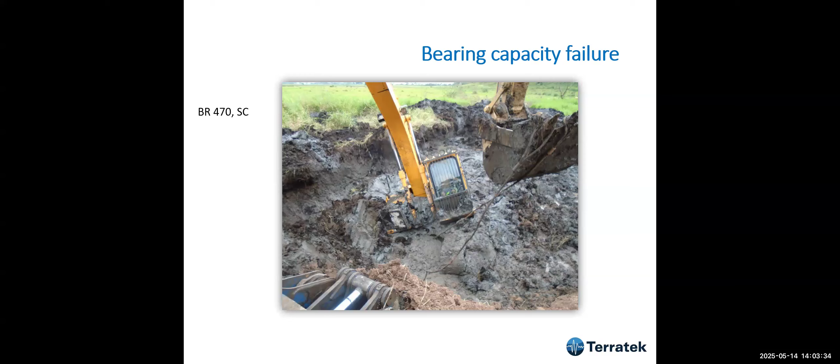Common problems that I have seen along my life: failures like bearing failures on soft soils. I've seen this one, a road in South America. This is another bearing failure which I had the opportunity to see, which took place in southern Brazil due to bearing failure. When this construction started, I suggested a solution, which was to reinforce with geosynthetics, but they decided not to do it.

I have seen many failures in embankments on soft soils, like this one, and this is probably the largest one I have seen. It was a very high embankment. Let me get the pointer. We see here the cracks, and the bulging of the clay in front of the embankment.

The other thing I've seen too many times are settlements on approach embankments, and this leads to big problems because there's a bump. I've seen these on railway projects and highway projects as well. On railway projects it's a big problem because the train bumps, and this may lead to mechanical failures which have to be addressed.

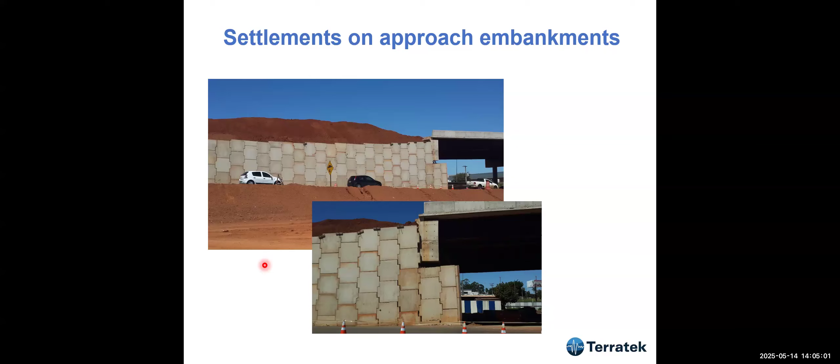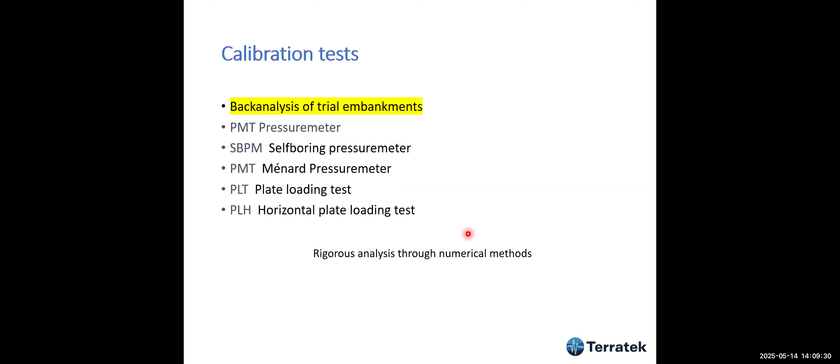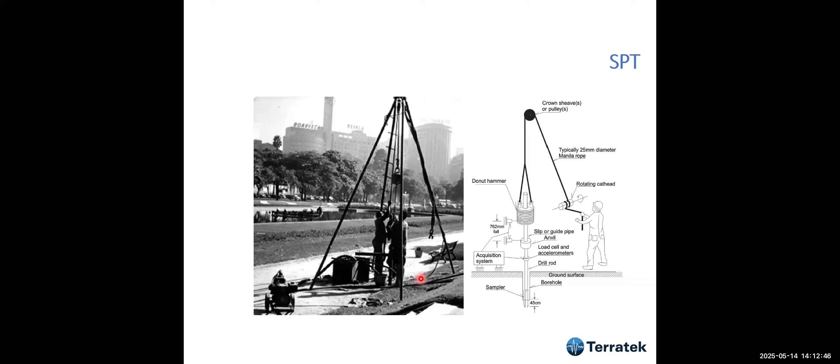The test is very simple: we drive a standard sampler into the ground and count the number of blows needed to make the sampler penetrate 45 centimeters. These are very standard tests, I'm not going to describe them with lots of details.

This is a very common, well-known figure of the SPT sampler. It was developed in the 1930s in America, and it has an outside diameter of 2 inches, which stands for 50 millimeters. The inside diameter is about 35 millimeters, and it's a thick-walled sampler. This means that the material that goes inside is going to have lots of disturbance.

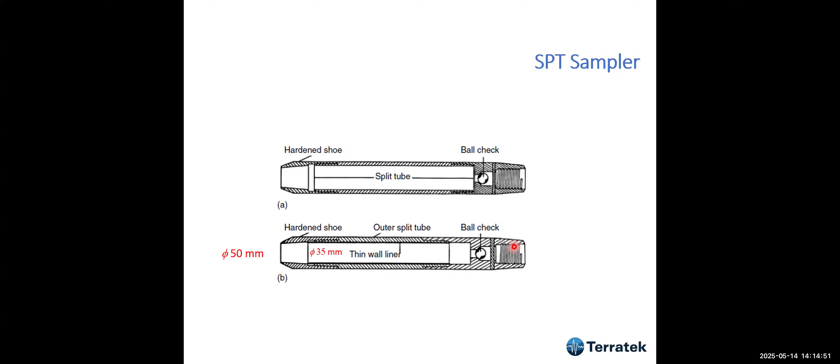Usually in soft soils, SPT is very low and it's not used. The only advantage of SPT is to determine the depth of the soft soil layer. In general, we take the soft soil layer up to SPT number equal to 4.

What's this SPT number? It's the number of blows to drive the sampler 30 centimeters, or 1 foot. These are very standardized tests used everywhere and very important.

But for soft soils, it's not the best, because if it's equal to 0, or very close to 0, it's impossible to get any property.

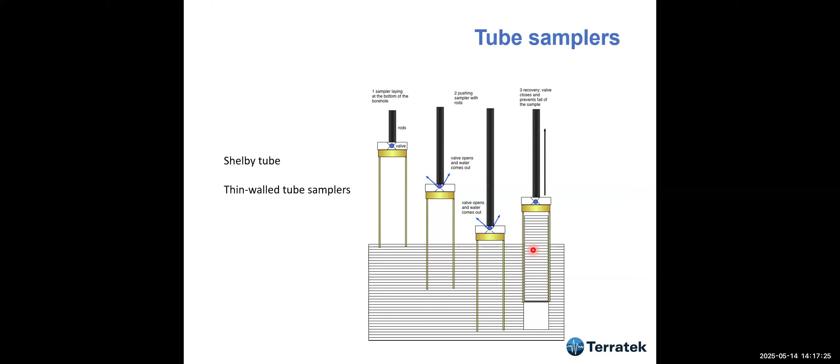Many years ago I carried out research, part of my MSc thesis at the time, in which I carried out lots of unconfined compression tests and UU triaxial tests on samples from different diameter samplers, as I'm showing here.

I started with the 50 millimeter diameter sampler, a thin-walled sampler, 63, 75, and went up to 100. As a result of this analysis, I found very easily that the larger the sampler, the better the results are. I published this long ago in one of my books.

The best quality, which yielded the highest value of undrained strength from these tests, were the 36 millimeter specimens obtained from a 100 millimeter diameter sampler. So we tend to use diameters above 75 millimeters. Under this value, there might be a lot of disturbance to the sample.

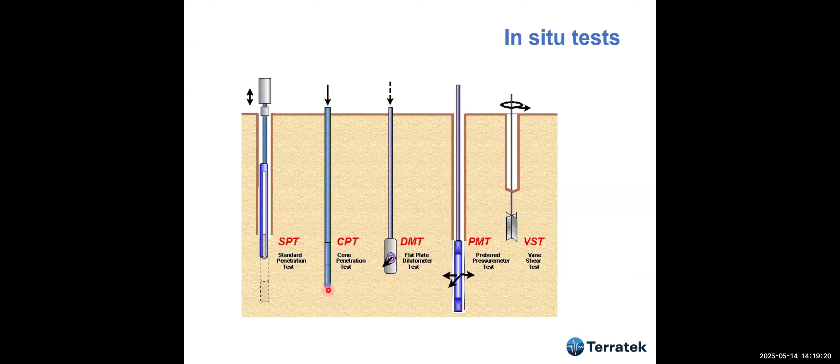Then comes, for me, by far the best test, absolutely essential in any project with soft soils, which is CPT. It's a cone, an instrumented cone, in which we measure three parameters, and it's pushed into the ground statically by means of a hydraulic system. The reference to these tests you may find online.

A little bit of CPT history. The first one to carry it out was Barendsen in 1931 in Holland. The Dutch had to develop something completely different from SPT, because Holland is a place of very soft soils — the SPT there is mainly zero all the time, so it's almost non-useful. That's why they decided to develop something completely different with static penetration, and they were very successful. So 1931 was the first one.

Then Gouda — Gouda is a place in Holland where they make that famous Gouda cheese, and also there was a mechanical factory, the Goudse Machinefabriek, which made these cones and developed the mechanical cone, Vermeiden in 1947. Then the electrical cone came with Fugro in 1964.

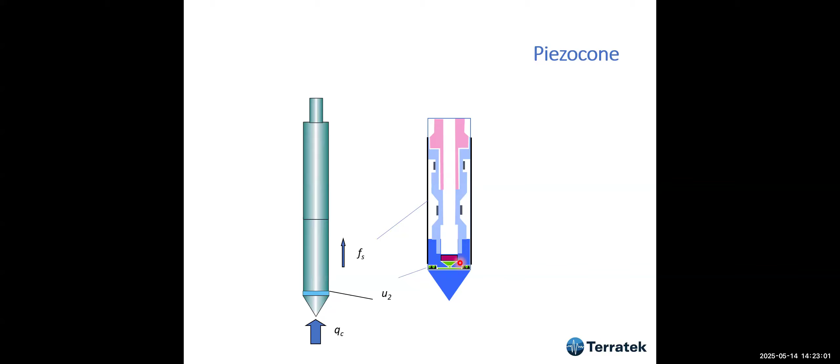So this is how electrical cones are made. They have a sleeve, a load cell for the tip, a load cell for the sleeve as well, separated, and very important, the pore pressure gauge.

There are many standards, but the ASTM standard is very good, and I always invite you to have a look at this standard - this is one of the best. Almost every country has a different standard, but this is quite good. Not all American standards are very good, but this one is, and this was my first experience with CPT.

I was doing my PhD at this time. I just finished my MSc in 1975, and there was a colleague of mine, Camilo Borges, who was working on the cone. He carried out the first approach of cone testing in soft clays, and he used this at the time.

We used this plotter. We didn't have digital equipment, so everything had to be plotted, and the results were obtained from the plot. And it took a long time.

I worked in Britain from 80 to 84, and at the time we used a plotter like this as well. Fugro used a plotter like that too. So, very very old equipment.

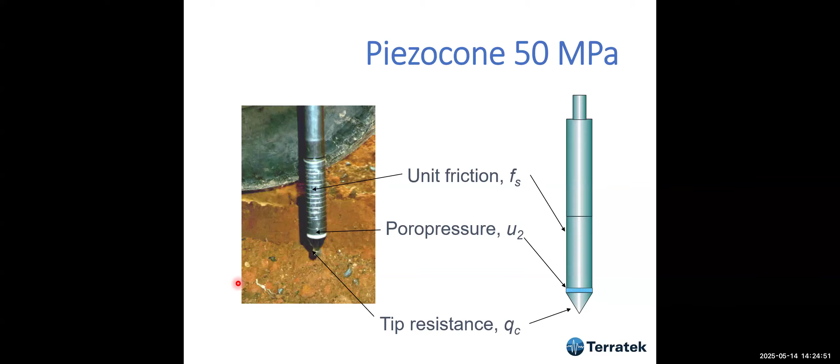This is in 1994, about this time. This was the electronic engineer that worked with me, and he developed the electronics for the cone. I bought a cone from Hogentogler, manufacturing in America, and we made the signal conditioning - but this guy made the signal condition. All we turned into a digital cone, and this was a big development for the cone.

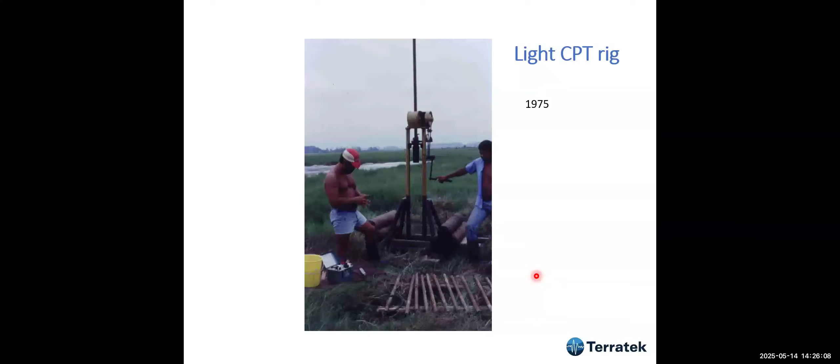As you can see, this was the first time, in 1975 - my first test that I showed you was carried out with this mechanical rig, very very rough mechanical rig that we used at the time.

And we carried out not only CPT, but a lot of seismic CPT as well. I'm not going to address this because it's usually not very important for soft soils. I had a marvelous experience learning from Professor Campanella at UBC at that time.

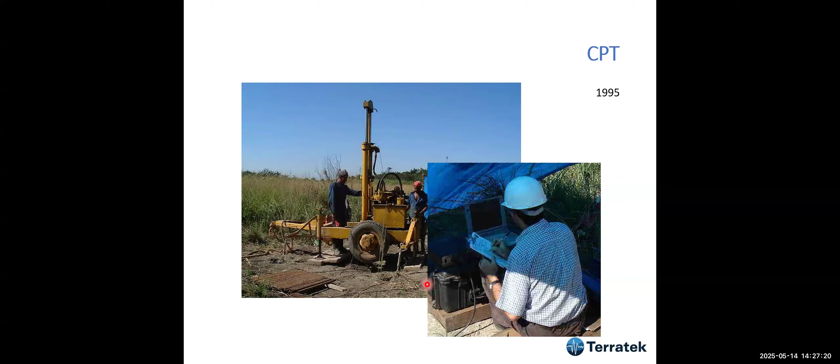And this is when we start to do tests back in, I think, 1995. That's the kind of equipment we had available. The cone was digital already, and this was a portable equipment.

Also, we have done some projects on a few mines in Peru around that time, and this was the truck I was working with. Well, what's amazing is it looks like I have worked in this truck twice.

One of them, the first time was 1984. I was working at Fugro in Hemel Hempstead in the UK, and I went out in this truck to learn how they used to do CPTs.

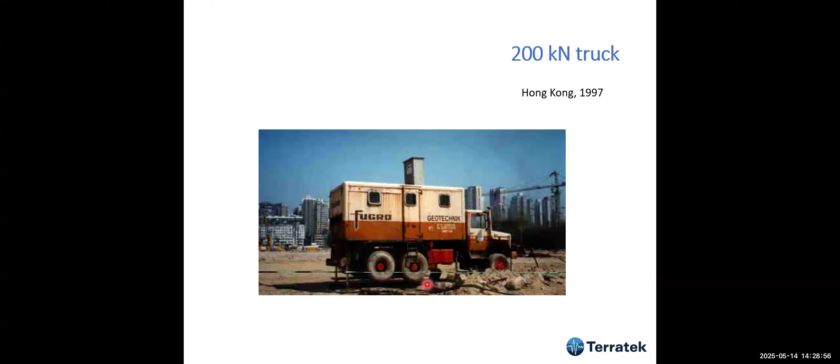It looks like the same cone, the same truck was sent later to Hong Kong by Fugro, and I happened to meet the same equipment in 1997, many years later, and we did a project at the World Olympic Stadium, something like that, in 1997. This was by far the most advanced equipment I have ever seen.

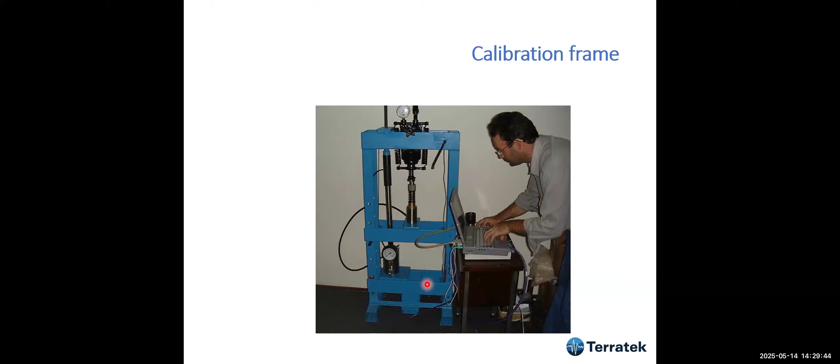We built this calibration frame to calibrate our cones. This is part of the quality assurance specs or procedures.

We also used this porous element saturation. We have two equipment. One of them was a sonic bath - this is something which is used in a machine workshop to clean. So we used that to clean the porous elements.

And then we have this compressor. I've seen this when I went to the dentist. I said, that's what I need to apply vacuum and to saturate the porous element. This is a big part, a very important part of the job.

Later on, I'm going to show you - I learned with Professor Campanella how to do a proper saturation of this cavity here by using a kind of funnel. I'll show you more details.

We put the liquid here. The liquid is... water, and I forgot the name - not water, I remember, sorry about that. It's something more viscous that we mix with water. We never use only water.

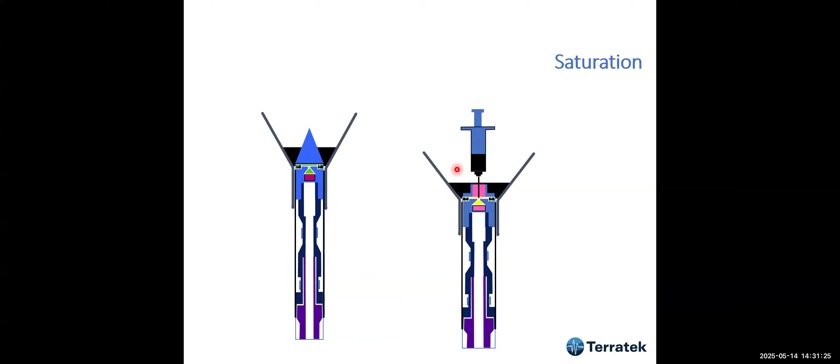And then what we do, we take the tip off and we use a syringe to saturate the element from inside out. This is the late Professor Campanella - he passed away a few years ago. He taught me this, how to prepare the cone, how to take off the tip, and how to do the saturation with this.

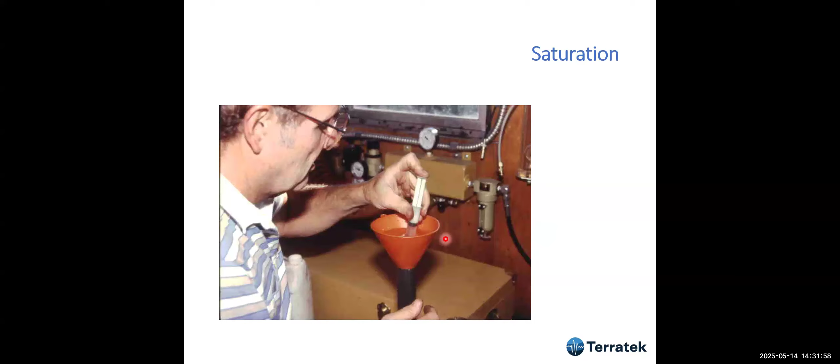And how to use the syringe to fill up the cavity from inside out, and then we use a condom - always use a condom here to make sure that we don't lose saturation during handling.

The other thing that was developed in UBC - they found the effects of unequal end areas. Professor Campanella told me a very interesting story: Fugro at this time already knew that, but they did not understand why.

They used to do offshore tests, and they used to zero the cone before going down into the water. Then when they came very close to the mud line, 100 meters or however many meters below, they found that the numbers were different on the screen - the measurements of tip resistance were different. So they had to re-zero the cone there.

Professor Campanella had the idea of testing and testing, and after some time he came up with the solution: you have this imbalance because the area behind the cone is different from the area in front of the cone. This ratio leads to an imbalance.

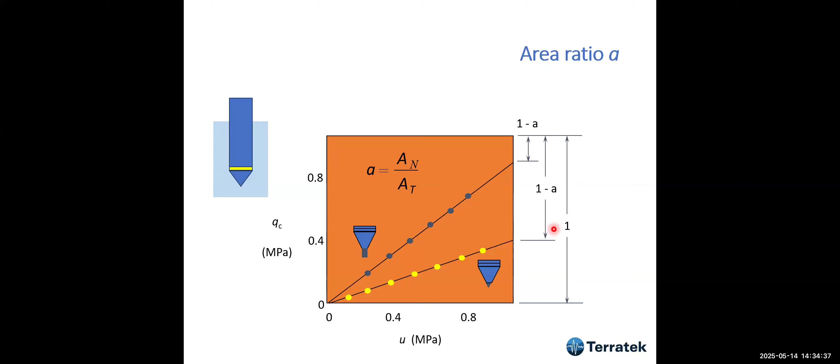But for the cone, what Professor Campanella did was put the cone into water and applied water pressure. He found that as he raised the pore pressure, QC also rose. So he concluded this should be a perfect cone, and most cones would behave like that. He proposed, and we used it a lot, a correction to the tip resistance.

We call it QT, the correct value, which is a function of the measured QC, a function of the pore pressure, and 1 minus A, where A is the area ratio between the top and the bottom of the cone. In most cones, this area ratio is 0.8 - it's impossible to have a perfect area ratio of 1.

We do one test once, and then we get this number, and we use it for all the calculations. The other thing which is very important...

I had a lot of problems until I found the best way to take measurements. The important thing is to get very good saturation.

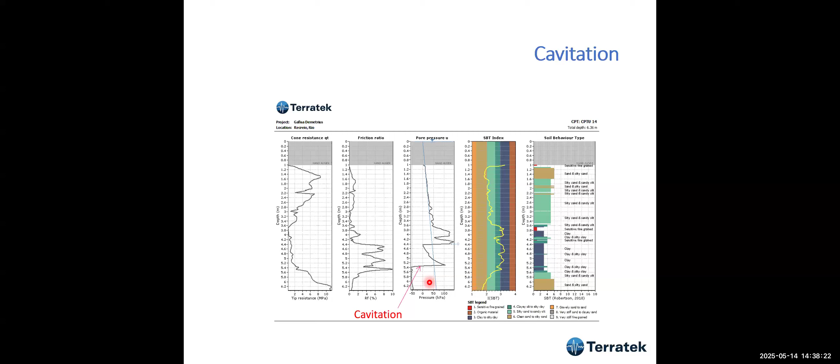Sometimes cavitation is nearly impossible to get rid of. This is a CPT we carried out to 6.3 meters depth, and I was unhappy. We carried out this blue one first, okay, and I was very unhappy with the loss of saturation at this point. Then, by analyzing the data, I asked the operator to do another one nearby.

To ensure better saturation during penetration and avoid loss of saturation, we carried out a small borehole, let's say 50 centimeters deep. We filled it with water, and then started the penetration again, and we got this red line, and we see much better pore pressure results. So this is an important point.

Stratigraphy - let's talk a little bit about this. This is how it started many years ago, in the early 80s. That's how we came up with stratigraphy. If we have tip resistance, in sands we have very high tip resistance. In clays they go back to nearly zero, very low values. Then we have another layer of sand, it goes up again, and then clay. So in the beginning, interpretation was only done by tip resistance.

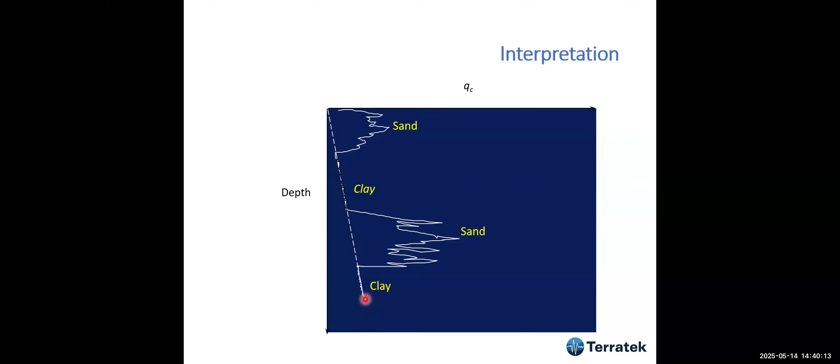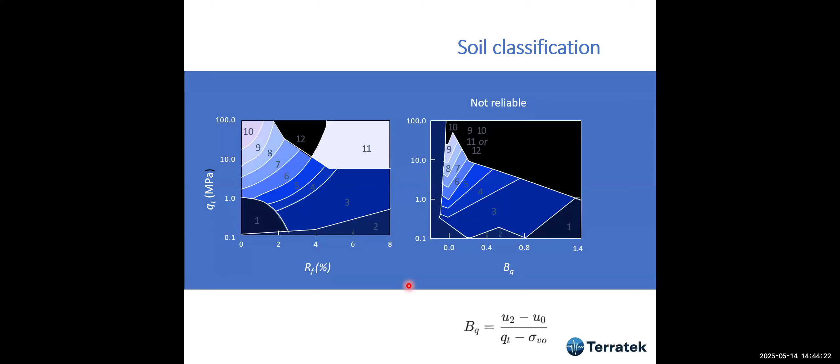On the other hand, Peter Robertson did marvelous work. I think he started with Campanella, then moved to Alberta, and he came up with this soil behavioral type, which is more or less the same as before, QT versus friction ratio, but he added different colors, normalized color behavior, so we can easily see what type of material we are working with. The first soil behavioral type classification he came up with had QT in megapascals and friction ratio in percentage.

Later on, this evolved, and I'm going to show you how we do it today. Usually CPT produces an enormous amount of data that takes a long time to process. While I was at UBC, we used to spend almost a week, four days at least, working on the data we got from a one-day field work. But today we have very good software.

For instance, what I use is this CPT software by a Greek company called Geologismiki. I also use CLiq for earthquake analysis, and I use this a lot. It's very helpful and makes the analysis very fast.

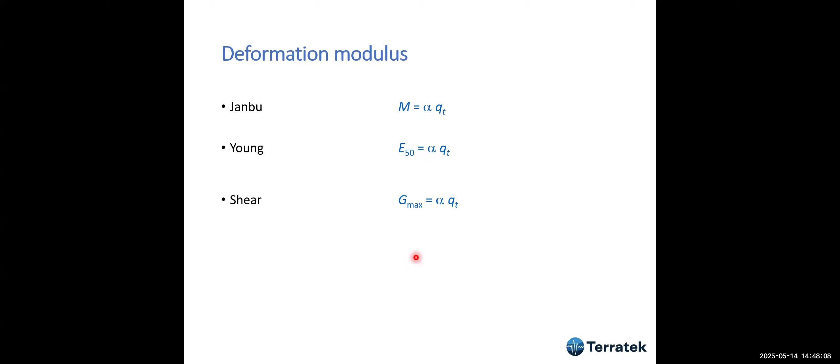This is very important. This is the first attempt, by Janbu, to come up with a one-dimensional deformation modulus M, and we can also come up with Young's modulus with a correlation like this, and shear modulus also with a correlation. Of course, the alpha values are different: alpha 1, alpha 2, alpha 3. Later on, the first published attempt, as far as I understand, to obtain this kind of modulus from clays was by Sanglerat.

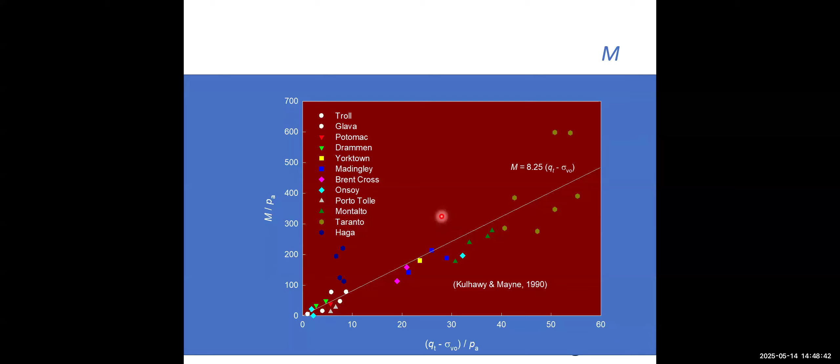He wrote a very important book, in French, and he came up with these correlations, which were used in the past. Later on, we have this by Kulhawy and Mayne, 1990, for many different types of soils, from sands to clays. Everything fits into an equation like that.

Later on, Peter Robertson did very good work. He improved this kind of correlation, the same type of equation, but separated it for different types of soils, for clays and for sands, and alpha can be obtained by this equation. The CPT software I use does it automatically.

What we get is settlement calculation: QT estimates M, and then we can come up with settlements through this very simple equation. I do this a lot, and I can assure you, I did a very interesting project with that yesterday.

The difference between using the laboratory tests and CPT was enormous. The guys who did the calculation came up with a settlement for an 8-meter high embankment of about 0.8 meters. My calculation, which I believe is very reliable, was about 3 times more than what the guys calculated.

I'm sure from experience, I can assure you, this is by far the best way to obtain settlement calculation from CPT. The other very important thing, but not so easy, is the dissipation test.

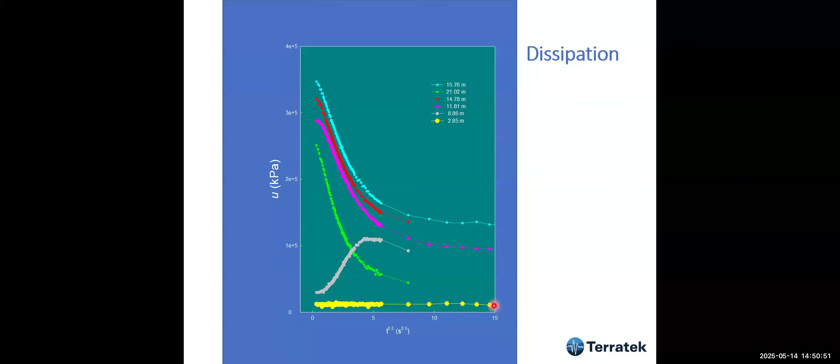So how can we explain dissipation by taking into account dilation and contraction? If you have a sample in a triaxial test that dilates, increases in volume—what happens is that if the sample is saturated, the particles will tend to come out, to dilate, and then the pore pressure would decrease. The contraction is just the opposite effect.

If the sample tends to contract during shear—consider four particles in the matrix—we may have a decrease in volume, and this leads to an increase in pore pressure. So the more pore pressure you have, the more possibility of contraction; it's a contractive behavior. On the other hand, if the pore pressure goes down, you may have dilative behavior. Today these concepts are very important, especially in tailings, and this is what leads to static liquefaction.

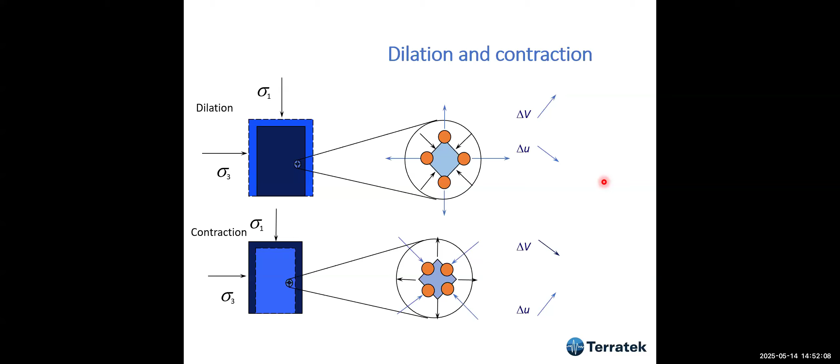Fugro, when I was in Britain in 1984, didn't use the pore pressure element in the beginning. I remember attending a conference at the Institution of Civil Engineers in which there was a very interesting discussion about whether or not to use pore pressure measurements in the cone. Some people were not convinced by them.

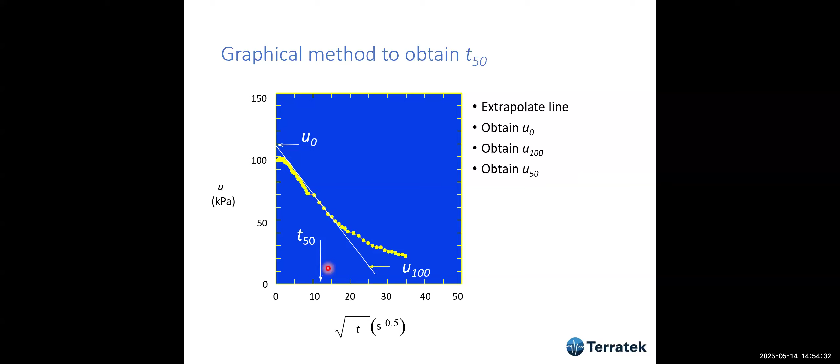This is also used in CPT. How do we do that? We extrapolate the line. This is dissipation plotted against the square root of time, and we draw this tangent line. We obtain U-naught, we obtain U100, then we obtain U50, which is the middle, and going back to the middle we obtain T50, which is used in calculations. This is an example.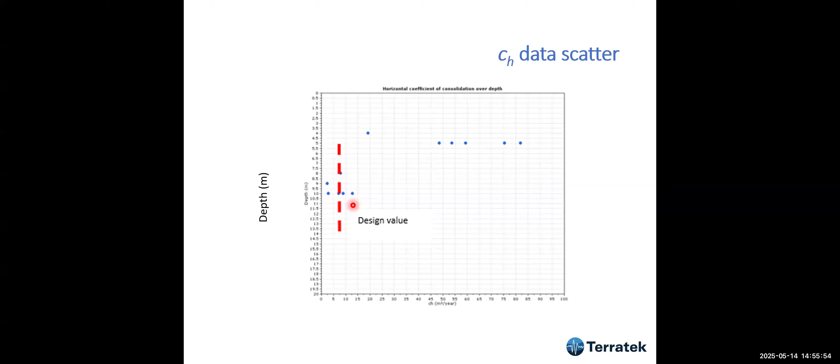And then what I do, I base my choice on experience. These are many sites, soft clay sites in Brazil, in which I have experience. I have all these values plotted, and as you see, there's a very large scattering. Most of the sites... this one, why is it so large? Because it's an alluvial clay, and these are marine clay. Marine clay tends to have lower values than this alluvial clay.

So when I have a project, I compare the results here, and then in order to select a proper value for further analysis.

In addition to that, we have to correct for the different drainage path, because the cone measures in the horizontal direction, and we have to measure for time rate calculation, settlement versus time calculation, we need CV, which is the vertical direction, and we still have to correct. There are ways to do that. I'm not going to discuss this too much, but usually if you divide by 4 or 5, you're not very far from the right answer.

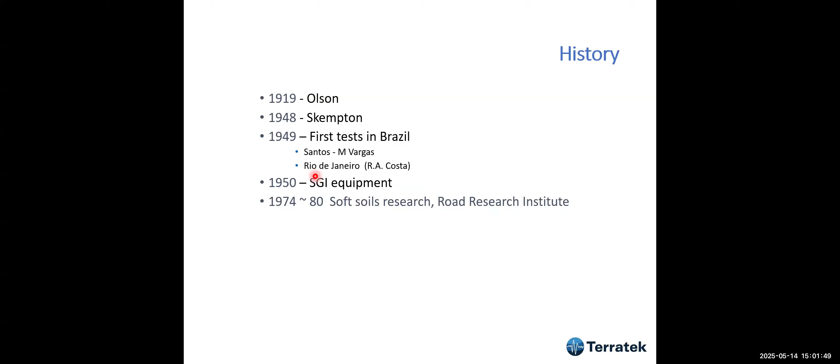I was a very young research engineer, and that's where I did my MSc and my PhD. It was a very interesting, very comprehensive research program. We did a lot of tests, and I'm going to address that.

However, in the end of the paper, although he did a lot of work, he recommended that we should keep the old equation, because that's where the experience came from. And this old equation relates the strength to the torque needed to move the vane, the torque value, and the diameter of the vane, for a vane where the height is twice the diameter.

Okay, and usually this is what we measured during the vane testing. We did an initial test rotating the vane, and you have the undisturbed value, and then we do another test after remolding it. We turn the vane 10 times — it varies according to the standard, but we turn the vane 10 times to get a completely remolded value of strength, and you do the test again. So we take these values of torque and we enter them into that equation.

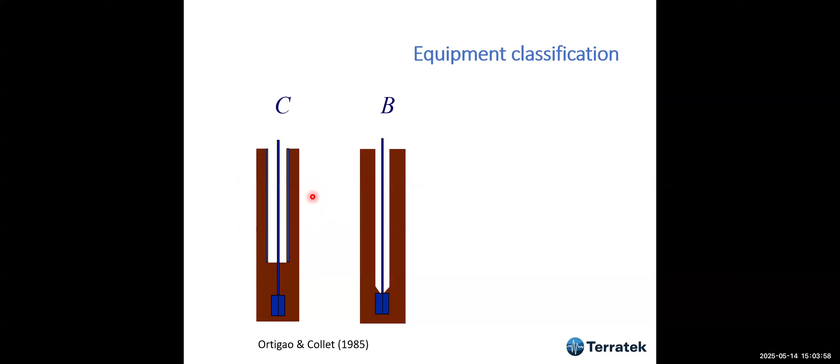And in 1985, I did, with a very good friend of mine, Harold Collet, an equipment classification, because we found out the vane in those days, the results could be very dependent on the equipment. We have this, what we call the C type, in which we have a lot of friction here; the test is done in a borehole, and this was used for many years. Then we have this different B type, in which the rods are protected against friction, like here, okay?

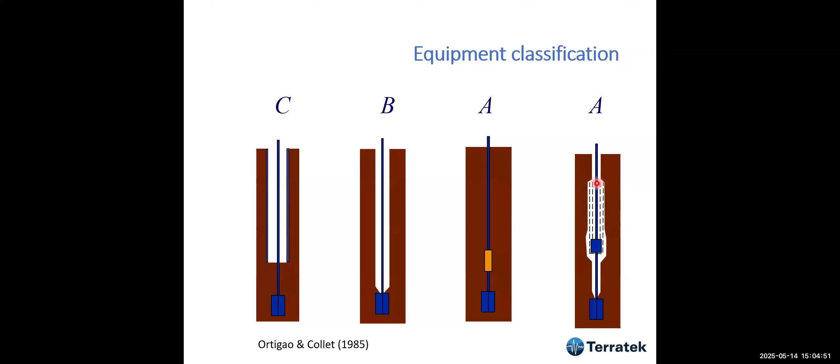We have the type A equipment, which may have a torque measuring device. In those days we didn't have that, but today we may have equipment with a torque measuring device, which could work well, so we get rid of the torque above. This is what we did in the past, originally suggested by the Swedish, and we designed something like that to have type A, and I'll show you why.

The equipment types are: first, the unprotected vane in a borehole with fully protected rods, so no friction on the rods. Then unprotected vane, unprotected rods, but you can have a torque load cell. And protected vane and protected rods. When we did this work, this was our choice because we didn't have a good torque cell at the time, and this is the kind of results we got.

We went to a site not far from Rio de Janeiro, a very soft clay. We did about 10 boreholes taking torque measurements, and this is what we got: very large scatter in the results. And why?

We found we had the problem of torque and the problem of translation. The vane would present a translation, so these problems would affect the measured values.

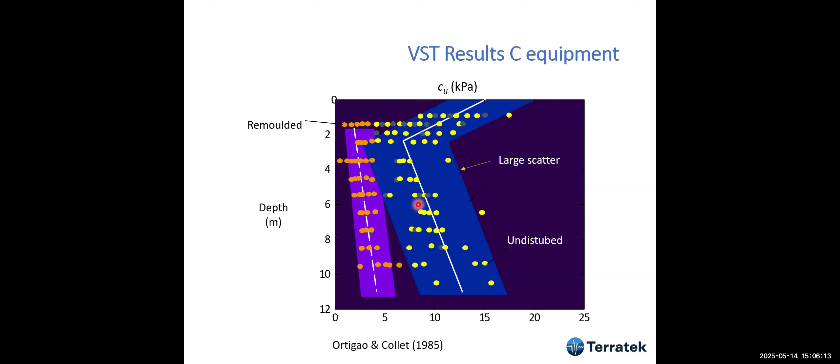The other thing we found: in those days the ASTM standard suggested we could determine rod friction by not using the vane like this. What we found was that it was nearly impossible to do this kind of correction, because the results were totally difficult to understand. For instance, we have a 2 meter torque, 3 meter torque, 5 meter - this is the depth - and it was very difficult to find out what the actual torque would be.

So the friction had a tremendous effect on the torque. The equivalent CU from these friction measurements would be 2 to 4 kPa, almost half the strength of that clay. So we decided that equipment was not very good at all - this was 1980, 1981 technology.

We decided to carry out a complete redesign of the equipment. I found a mechanical engineer, a friend of mine, who helped us completely redesign it. The rods were totally protected, with bearings to avoid friction, and the vane would go into a protection shoe - this was the Swedish idea which we used. It was a steel protection shoe. The vane came out, did the test, and went back into the protection shoe. He also designed a better unit, and we used this, and the results were completely different.

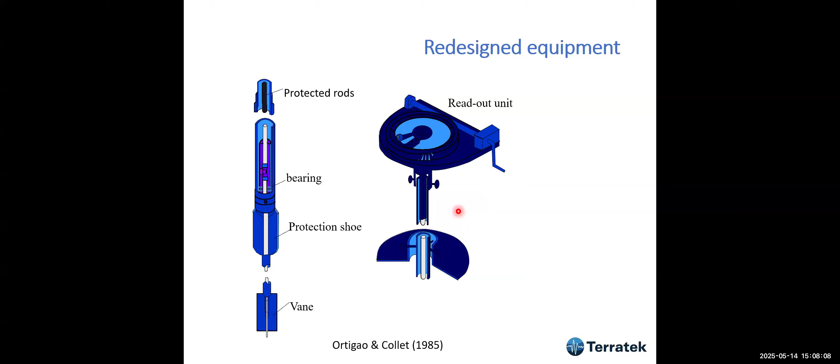I presented this paper at a conference, an ASTM conference, I think it was 1985 in Tampa, Florida. I went there, presented the results, and we confirmed two things that were very clear from that conference. First, we have to standardize the vane, because diameters and shapes vary so much, we may not have a standard for the vane. And this test is partially empirical, so that's why standardization is so important.

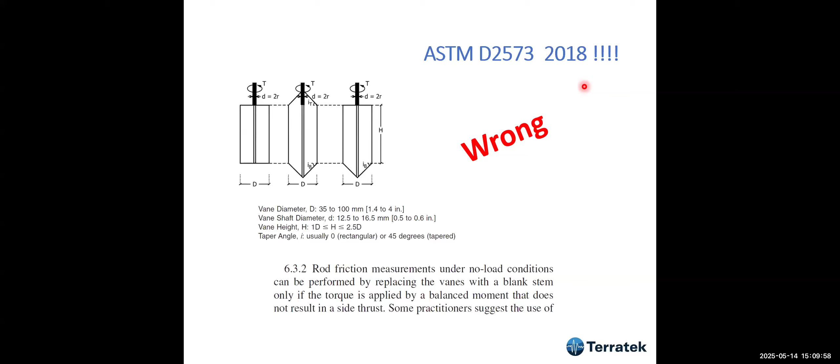But the worst part was that in that standard, we told people very clearly that rod friction measurements under no-loading condition cannot be performed - cannot. But still they keep it today; in the 2018 standard it's still there. I think it should be changed. But since 1985, despite the conference that I attended and many people agreeing with that, nothing was done to this standard.

Let's go ahead. There was a big discussion in those days, started I think in 1972 by Bjerrum. Bjerrum was the first to address vane correction. He came up with the idea that as a function of PI, plasticity index, we would have to correct the vane shear strength empirically. He was the first, in 1972. Then other people came up with some ideas, etc.

The problem is it's not an easy task to do this kind of correction. What people tend to use today as a vane correction factor, in order to get a factor of safety of 1, is to correct the value by multiplying field values by 0.7, and that's what I do. The scatter in these PI values could be very large, so if we use 0.7, we may get the correct answer.

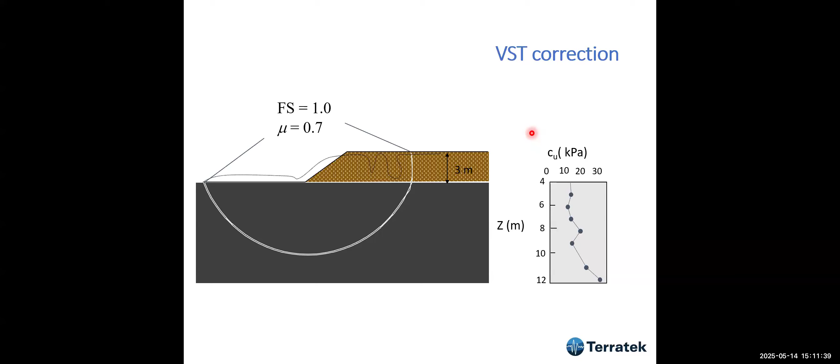Another thing is that at sites where we carry out lots of field vane tests, very good ones, very reliable with good equipment, you still have a lot of scatter. Then you have to decide what shall be the design profile. If we use the average, we may be very far off. This is the design decision I have used, and you still have to multiply this by 0.7 to get the results. That's what I usually do.

Also, what I always do is a kind of calibration. I always compare the results from vane testing, undisturbed, with the values obtained from the cone correlation, from the piezocone. This is very important. In any project, you should combine CPTU and vane testing, and compare the results in order to calibrate the correlation you're going to use for the cone. Here's the kind of calibration I've done in one of my projects.

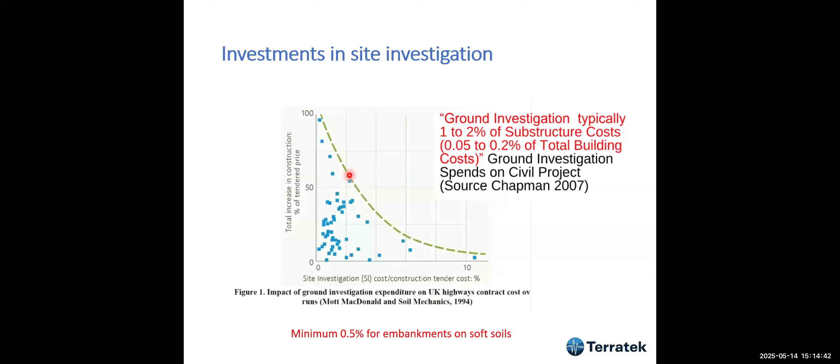This varies according to the type of structure, but also the risk. For instance, in dams we should invest something like 3% — that's the target, and in tunnels as well. In soft clays, the minimum should be 0.5% for embankments on soft soil, because the risk is lower than tunnels and dams. This should be the minimum investment you should always take into account.

And trial embankments — this is the way that I've learned. I have worked my whole life on all these trial embankments. The first one was in 1975; I didn't design it, but the ones after that I have designed. I've designed all these embankments except the first one, and we learned a lot. I'm going to address a few of them.

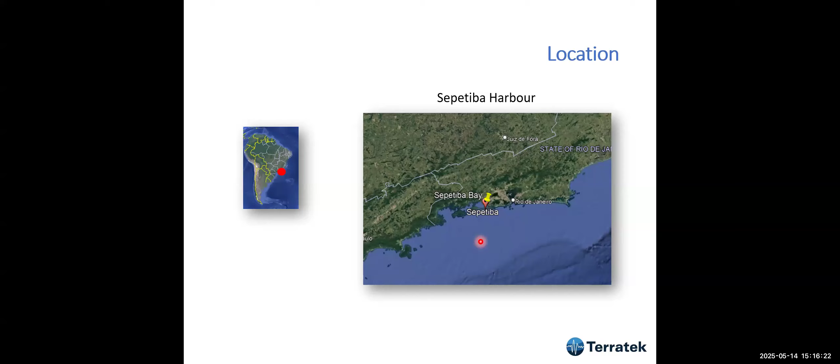There was an Italian company that came to Brazil in those days, and they proposed stone columns. The designer, a big company, Planave, decided to accept the idea and designed an embankment to test these stone columns.

These stone columns were made with casing. They installed a casing with a diameter of 520 millimeters, installed with a vibrator, and tested column spacing from 2.5 meters to 3 meters.

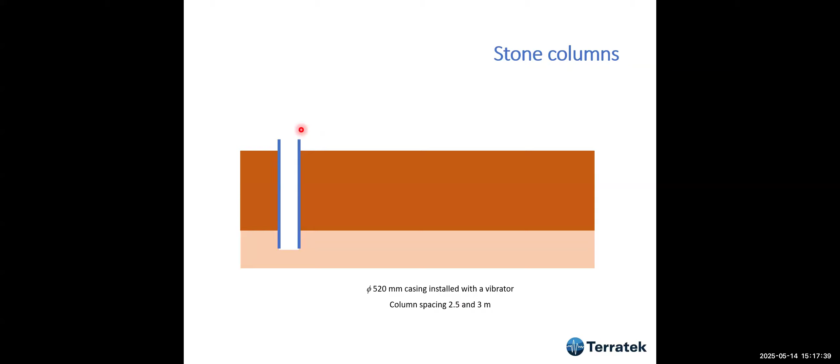The installation method: install the casing, fill it up with gravel, and then use a big vibrator at the top to extract the casing and leave the column ready.

Planave designed an embankment like that, up to 5 meters in height, over soft clay that was 15 meters deep.

To test this, I helped with the instrumentation. In those days I was working at the Road Research Institute, and I had designed and built several hydraulic piezometers, hydraulic twin tube piezometers, to use in the research. This was 1970s technology, so we used mercury manometers to do that.

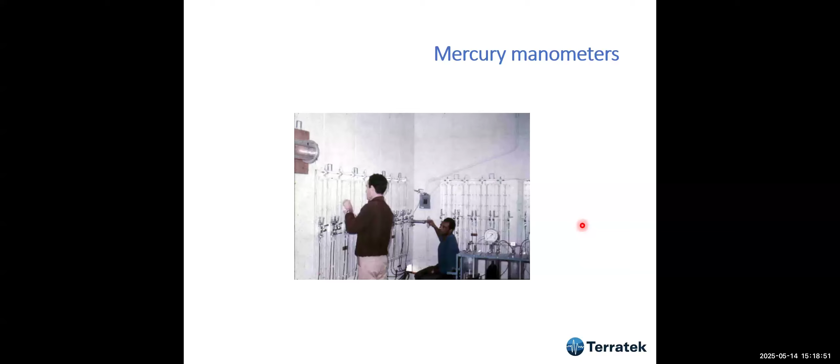Today it's a nightmare—no one is going to use hydraulic piezometers for a job like this. But in those days, that's what we decided to do, and these piezometers were very successful. The equipment for the piezometer was very complex. I won't talk more about it because no one uses hydraulic piezometers anymore; today we use vibrating wire piezometers, which are much better.

Despite all the efforts, the settlements with stone columns were very close to those with no ground improvement. They had two embankments, one on stone columns and the other without, and so the designer decided not to use this solution for the stockpiles of the harbor.

Lessons learned from this embankment: stone columns were not efficient due to the small diameter casing. Today we use much larger stone column diameters, about 900 millimeters, with spacing of 2.5 to 3 meters.

Today we can do calculations—I did some recently just to check—and now we understand that better. The installation method also evolved a lot over the years.

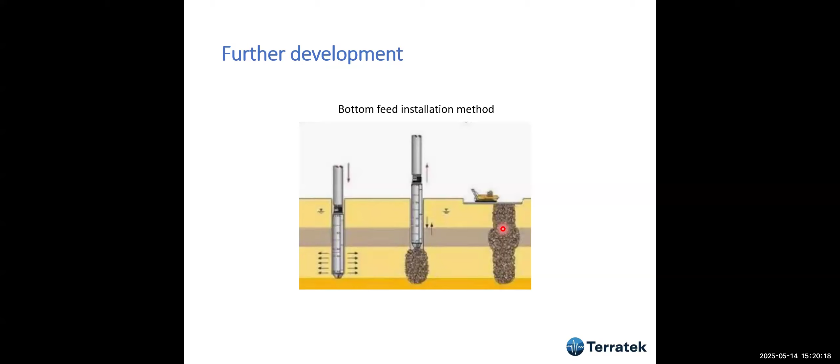Much later, the bottom feed method was developed, in which gravel is installed from the bottom and vibrated with this equipment. This gives a much better column: large diameter, well compacted, with fast installation rates, less soil disturbance, better gravel compaction, and better column continuity.

If we extract with the old method, we may get something like that, which would not happen with bottom feed—bottom feed doesn't allow this to happen. Okay, this is not enough.

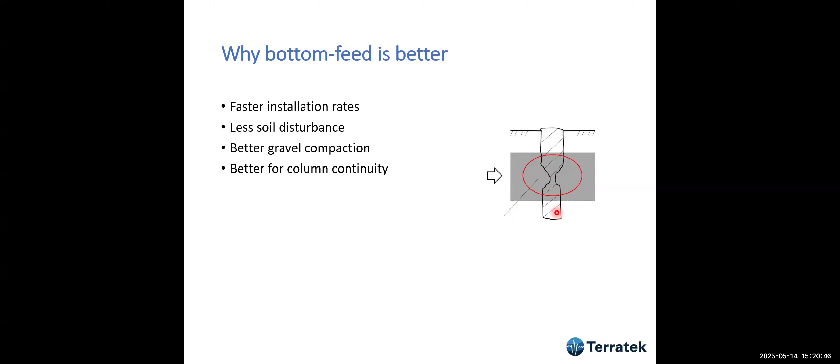The same when I was working at the Road Research Laboratory, we designed these embankments later on. We decided, first of all, to test soft clay. So we found a site not very far from Rio, and this research took place from 1974 to 1981.

We did three different field experiments. The first one was embankment one, which was taken to failure—that was my PhD thesis. And then I continued working on that.

We did the access road, which I'm going to show you. For the first time, we tested geosynthetics under the access road embankment. In those days there was a lot of debate about which type of drain to use: wick drains, jetted drains, open mandrel, closed mandrel.

This was the first embankment, which was my PhD project. It failed on 7 December 1977. It was a very interesting experience.

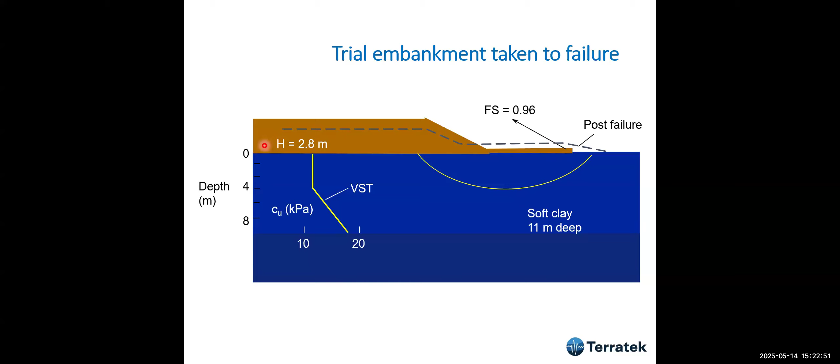But anyway, we did a lot of analysis and found that using the mean value of the vane strength, we could get a factor of safety not very far from 1, which explains the maximum height the embankment reached, which was 2.8 meters.

Lessons: the maximum height was 2.8 meters on that clay. Back analysis using mean uncorrected field vane strength yielded a factor of safety not very far from 1. Bjerrum correction, in those days, we found would not apply, although today I would prefer to apply it to be on the safe side.

The field vane equipment was improved to avoid friction and rotation of the vane, and all instrumentation was locally made. I designed almost everything except the inclinometer, which was bought from Slope Indicator at the time.

This was embankment two, fully instrumented with vertical extensometers, magnetic extensometers, inclinometers, lots of settlement plates, and horizontal extensometers as well. And we tested it, because this was the main question.

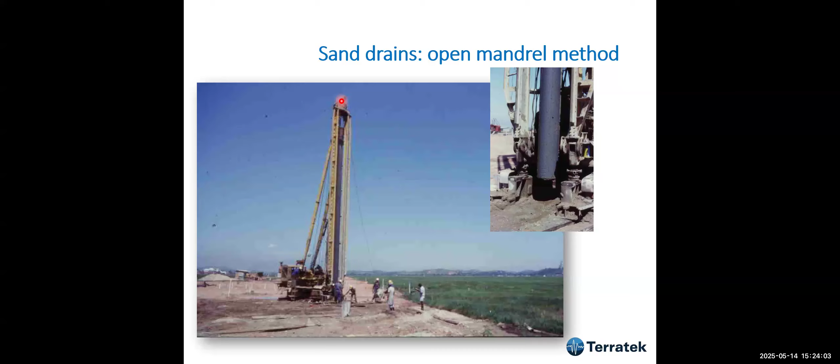Could sand drains be used in those days? What was the best, wick drains or sand drains? This was tested in this embankment. We used the open mandrel method with Franki type equipment, and we used jetted sand drains, which were used in those days by jetting water into the clay in order to create a borehole. We also used wick drains, not the technology we use today, but what was available in those days.

We also had a very bad idea to try non-woven geosynthetic wick drains because we thought the water could come out of this, and it was a failure. What we found later on is that the vertical permeability along the geosynthetic wick drains is very small; only the horizontal permeability is high. So anyway, we tried and we tried and we learned from the mistakes.

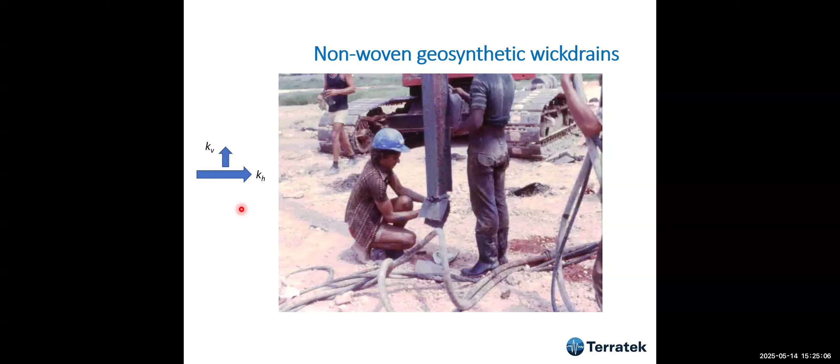But the mistakes were made on a trial embankment, not the construction itself. So, pore pressure measurements: the closed mandrel led to very high pore pressure in the clay, the open mandrel less, the jetted drain not very high, and the geotextile and wick drains had the best behavior in terms of pore pressure during installation.

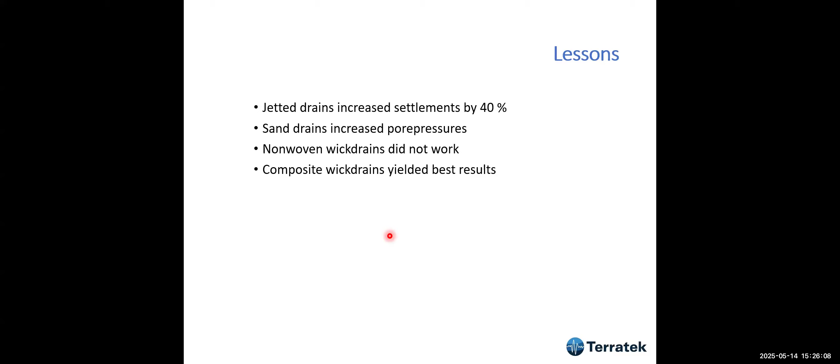And settlements - we measured settlements in all these sections. We could compute, and what we found was very interesting from the experience. I'm not going to give all the details, but we found the jetted drains increased settlements by 40% because of soil disturbance. We didn't know that. Sand drains increased pore pressure a lot. Non-woven wick drains did not work at all. And composite wick drains yielded the best results. So these were the lessons that we learned.

And then we did the access road, which was an access road in order to bring the material to the main embankment. This is the access road design. It was only 4 meters wide for the trucks to pass.

Then a geosynthetic manufacturer, the first I ever met, came to us and gave material for us to test. So we applied the geosynthetic here in order to test whether or not it was a good idea. This was my friend, today Professor Emeritus Palmeira, but this was 1981 - it was his MSc thesis.

We used a non-woven geosynthetic, 400 grams per square meter, but the strain at failure was 30%. I said, it's not going to work - why? Because the strain at failure is too large. Okay, let's test it, let's see.

We did sections like this, with different ways of stretching the geosynthetic under the road. We did it like this with anchors, and like this anchored differently. And what we found is that the geosynthetic worked - despite my initial belief that it wouldn't work, it worked very well.

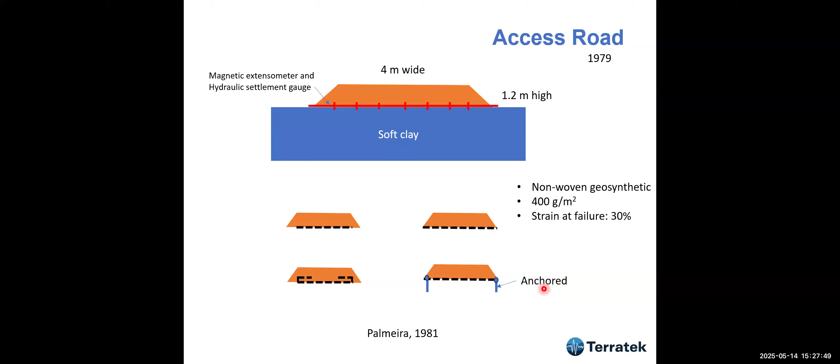The lessons were: settlement measurements were from 100 to 200 millimeters, measured strain was 10%. How did it work? Because when the geosynthetic has horizontal pressure over it, the strain at failure is much less. Bearing failure occurred at the control section without the geosynthetic. Reinforcement effects were seen after 200 trucks passed. So the reinforcement prevented bearing failure, reduced settlements by 20%, and reduced embankment volume by 20 to 25%.

So my previous beliefs were totally wrong. Testing, testing, testing - this is absolutely necessary.

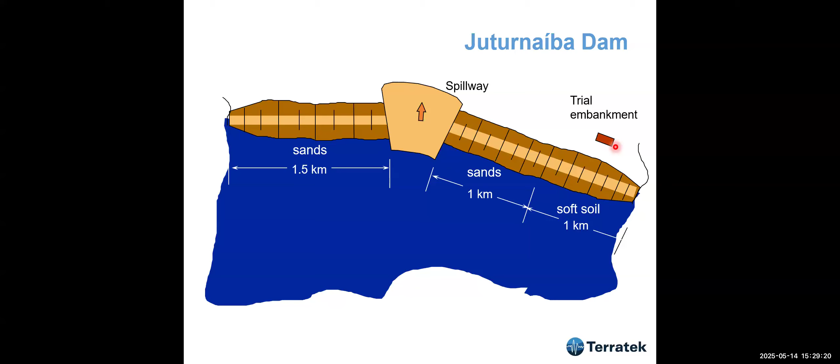And then we did this dam. I was invited by a friend of mine who was the main designer of this dam. It was 150 kilometers north of Rio. This was sand, no problem with the foundation, but it was 1 kilometer of dam - not very high, 12 meters high, with a lot of soft soil. So they invited me to carry out this trial embankment, and I designed it, and we did a lot of work to understand its behavior.

These were the properties - I won't talk too much about this, but we had some layers with peat in addition to clay. We carried out all these tests, vane tests, lots of laboratory tests, etc. Then this was the design decision that had to be taken: to berm or not to berm. This had a very high implication on cost and also in terms of risks. That's why the designer invited us to work on this. The dam was not very high.

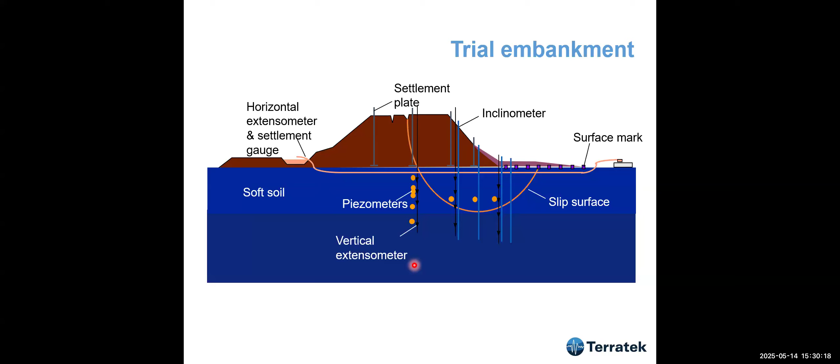And we did the trial embankment, fully instrumented. Now we had a lot of experience with instrumentation from all that previous trial embankment work, and we did the best we could. This became the PhD thesis of one of my friends, who also is a professor of soil mechanics, and he did this analysis.

The lessons here were: the slip surface was located through instruments. We had lots of instruments to locate the slip surface. Mobilized mean undrained strength at failure was about 20 kPa, which was the key parameter for the dam design.

Why did wick drains and temporary surcharge work so well? This was by far the best method in that embankment, trial embankment 2. The best behavior came from wick drains. Let's discuss why.

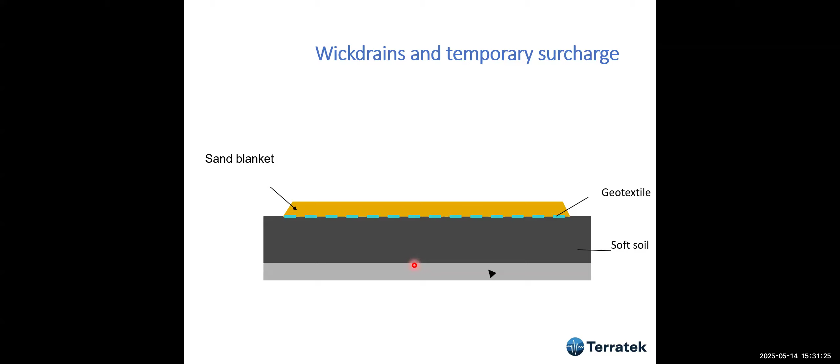After that experiment with geotextile, we came up with the idea of always using a geotextile to protect the sand blankets, which allows the water to flow. To ensure continuity of the sand blanket, we should always use geosynthetics, and then we install the wick drains.

When we have high embankments, we use geogrids, which have shown to be very good instruments to avoid failure and ensure safety. Then we put embankments with a temporary surcharge, and after a few months, usually six, we take it off. We did lots of projects like that.

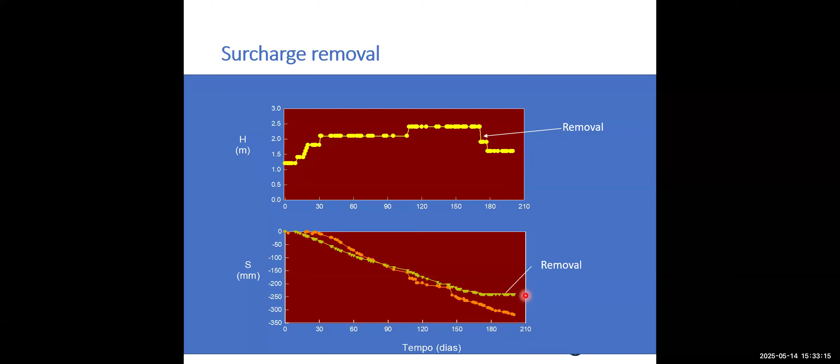This is another section where the surcharge was not removed, and we still had a high rate of settlements taking place. So removing the surcharge led to settlements stopping, whereas here, where surcharge remains, the pore pressure stays more or less the same.

Here we used vibrating wire piezometers, so very reliable readings and very easy to install.

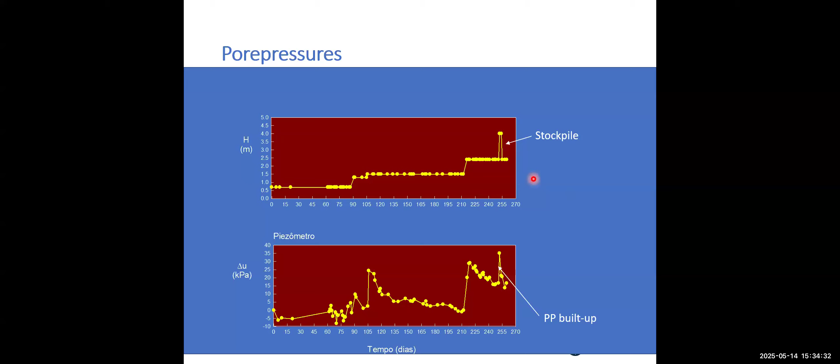We had some material to increase the surcharge, so that's what we did. Here, by mistake of the contractor, he stored some additional material, about 2 meters, at this section. What happened? The pore pressure built up very quickly. When I saw it, I said we have to take it off immediately because I was afraid of a failure. No failure took place, but they removed the material and the pore pressure went down.

I have been to this place many times. It's a nice place around a lagoon in the north. I've been there 5, 10, 15 years later, and we don't see any defect, despite having nearly 12 meters of soft clays, very soft clays, here.

Lessons from this experience: first, how to avoid disturbance of the clay, by keeping the cross section of the mandrel less than 70 centimeters square. This is what I wrote many years ago in one of the standards for the highways department, using that number, not more than 70 centimeters square. Also, you have to ensure the sand mat has very good drainage.

Thickness should usually be more than 40 centimeters, and we always use a woven geosynthetic to ensure continuity of this mat. The other thing is, if you have a very wide embankment, water may not come out, so you have to design drainage.

One of the projects I'm working on today is a very large area, so we have a drainage system with gravel. There's sand, say 30 centimeters, then 20 centimeters of gravel, and then sand again, to ensure drainage.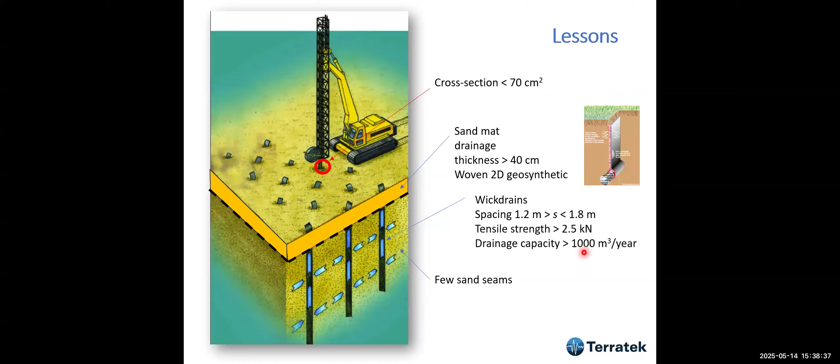Tensile strength is also very important, to avoid breaking the wick drains. Drainage capacity - there's some research about that. I use the values recommended in the literature, but we make sure the drainage capacity is 1,000 cubic meters per year. And with few sand seams - if you have lots of sand seams, there's no need for wick drains.

This is another project I did at Porto Alegre Airport. We had very soft clay - 8 meters of very soft clay - and we decided, Keller had a contract to do deep soil mixing. I was involved in analyzing the behavior of the trial embankment, the mixing plant, and quality control. They did a lot of unconfined compression tests on samples, and in this trial embankment we had settlement plates, earth pressure cells, piezometers, etc.

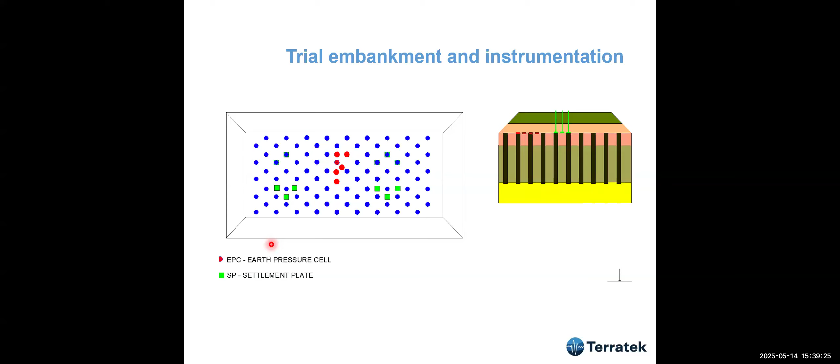So the lessons I learned: DSM has a very high production rate of 5,000 meters per machine per month. So if you want to do any treatment very fast, DSM may be the answer. The embankment had very good behavior - I'm not going to give all the details because of lack of time.

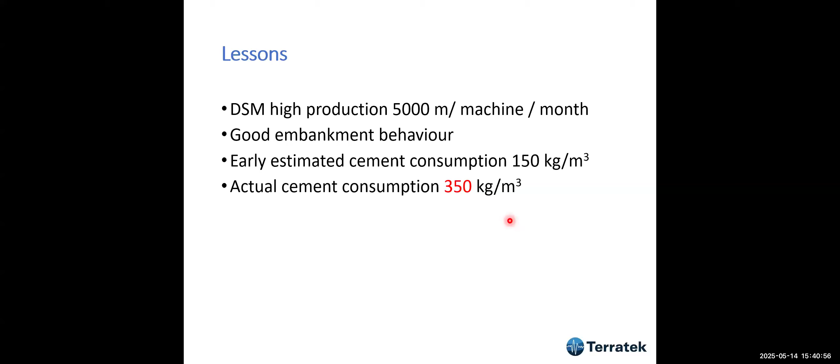The early estimated cement consumption was 150 kilos per cubic meter. This was a surprise, because the actual amount needed, according to the tests, was much higher - 350 kilos per cubic meter. So to analyze the cost of a project like that, you have to be very careful about cement consumption, and the only way to do that is testing, testing, testing - and the need for initial dosage studies. Sometimes even if you do a lot of dosage studies, you have to take actual samples from the columns to come up with the ideal cement consumption.

Final step: lessons from someone else's errors, which I've seen and learned from. It's very nice to learn from someone else's errors, especially on a construction site.

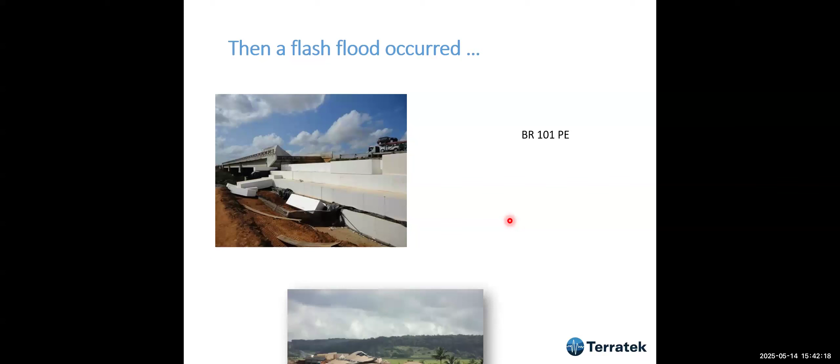One of them was light embankments. A light embankment is something where you use EPS - plastic blocks with a very light unit weight of about 1 kilonewton per cubic meter, so 10 times less than water. This is a site in the north where a friend of mine designed a piled slab for the approach embankment on soft clays, but then a consultant came up with the idea to use EPS instead - much better, faster, cheaper, etc. But he forgot something very important: floods.

I was told by this friend that once there was a football game in another city, and people had to cross this river to get there. So lots of people went to watch the game, and on the way back, just before, there was very heavy rain and flooding at the abutments. What happened? All the EPS, or isopor, floated and destroyed everything. So you have to take care about that.

I have other projects where I feared floods, and I've seen designs like that - just out of fear of floods, I decided not to use EPS for safety. The other thing I've seen many times: people put in a new embankment and forget about the old embankment. So when they put the new embankment next to it, cracks appear due to differential settlements.

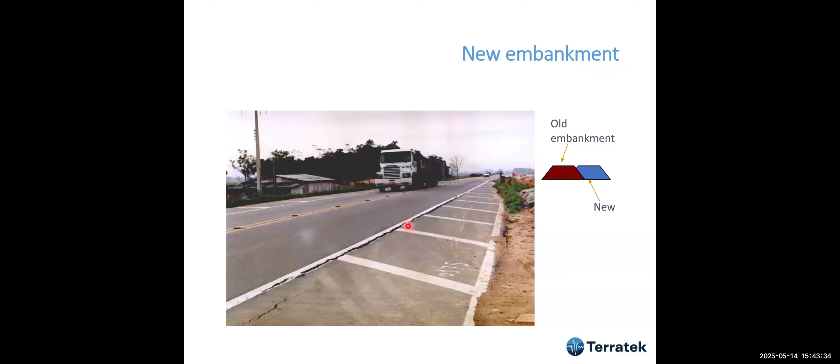So if you are going to design something to enlarge a road on soft soil, either you take care of the settlements, make sure that you don't get lots of differential settlements between the new embankment and old embankment.

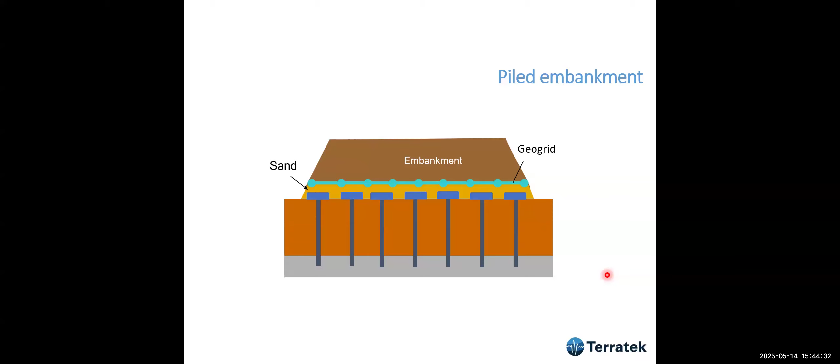The other project which I learned from someone was piled embankment. Piled embankment works well if you do it right. You put the piles in, you put the pile caps, you raise the embankment, and you put geogrids on the embankment, and it works. I've seen this work many times. It's not cheap because one of the problems is the rate of installation of piles is very long, takes a lot of time. That's why DSM is much better, much faster.

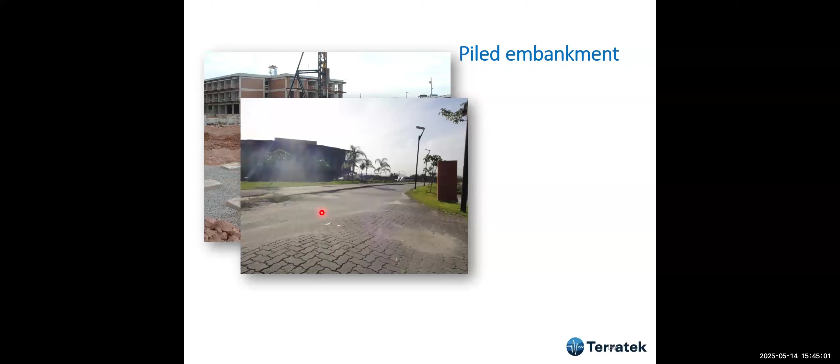This is a piled embankment which I was invited to analyze the reasons for the failure. The construction was with concrete piles being driven. This is the pile cap. When I was invited to the site, the pavement was like a roller coaster, with lots of undulations due to settlements in between the piles.

The other thing which I learned from others' mistakes was vacuum consolidation. Vacuum consolidation works very well. It works in many places, in many countries. They do it a lot in Holland, and it works provided you take care. First of all, you must make sure that the vacuum works, there's no leakage. Second thing, you should not have a lot of sand seams.

If you have sand seams, you're going to pull out water from the sand and not from the clay. Also, the wick drain should never go to the bottom of the clay, because then you may pull out water from the sand or other material underneath, and not from the clay.

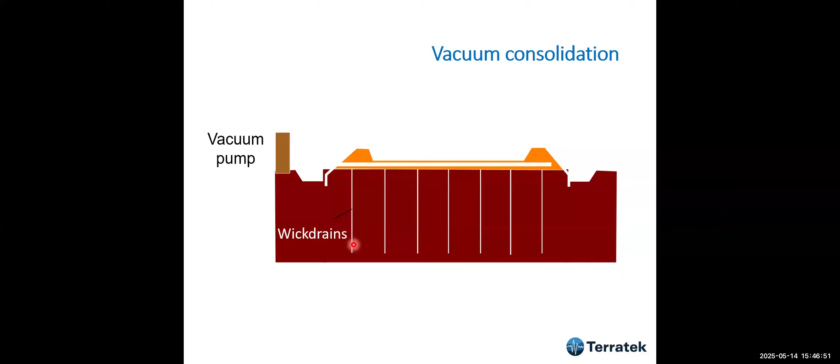This is exactly what has not been done in this project, in which they measured pore pressure while they were putting the embankment. And the pore pressure, instead of having dissipation, the pore pressure increased. They had this kind of failure take place, due to the fact that they did not carry out experiments before.

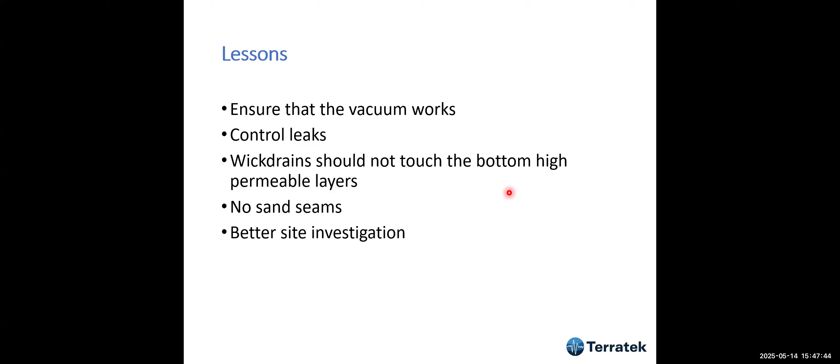For a project like that, you have to ensure that the vacuum works and control leaks. The wick drain should never touch the bottom of the high permeable layers, the bottom of the clay. Never. No sand seams. If you have a lot of sand seams, it may not work. Much better site investigation is needed, and especially a trial embankment.

The final topic is instrumentation monitoring, which I'm going to address very briefly, which measures necessary settlements, horizontal displacements, and pore pressure. This is the kind of instrumentation layout we always use. We have vibrating wire piezometers installed in the foundation, inclinometers at the edge of the embankment, and settlement plates. We may have lots of settlement plates as well.

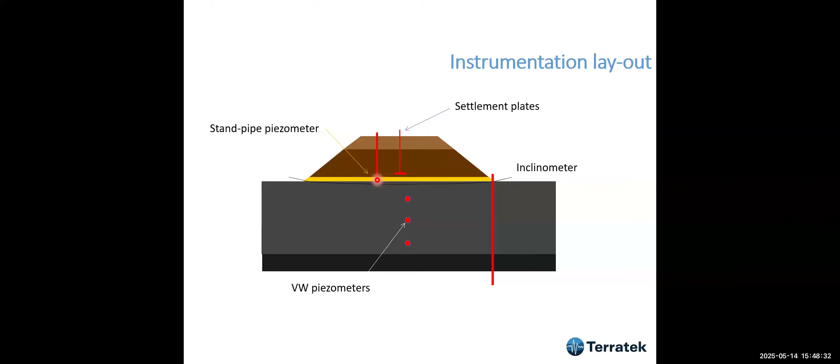If you are doing wick drains, you always need to check the water pressure in the blanket to make sure it's zero. And different types of piezometer - standpipe piezometers we use only in high permeability soils like sands, etc. You cannot use this in clays, as I have seen people trying to use this kind of piezometer in clays. It doesn't work.

Stability control - the best method by far is by looking at the inclinometer results, and this is the displacement that we have, and this is the rotation which the inclinometer measures directly. So if you have a very high distortion, that's when you're approaching failure. Distortion leads to failure. Why? Because imagine this is the inclinometer before and after - with that inclinometer you are measuring this kind of distortion.

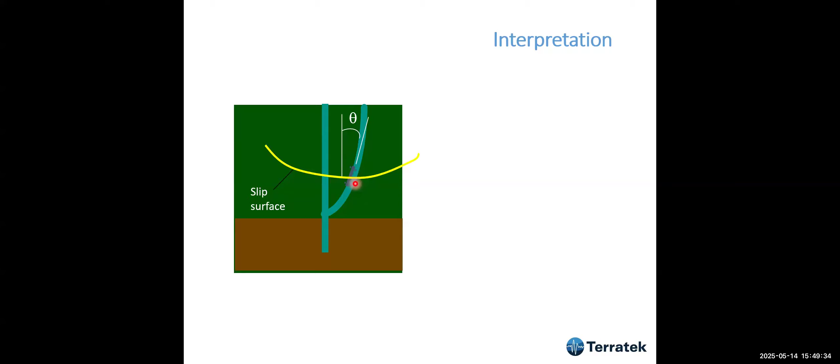If you imagine the slip surface here is more or less horizontal, then this element is, we are measuring theta, and beta, which is the angle here at the bottom, is zero. So that's why the strain...

In this embankment, I had several inclinometers, and I happened to locate the slip surface through the inclinometer. And then we are coming to the end of the talk.

Let's talk a little bit about philosophy: physics versus soft soil engineering. Einstein proposed a new theory, and then many years after, someone comes up and proves he was right, in many things. I think soft soils engineering is quite the contrary, because in my humble imagination, I imagined lots of solutions that should work and didn't, and some which I thought would not work at all worked very well.

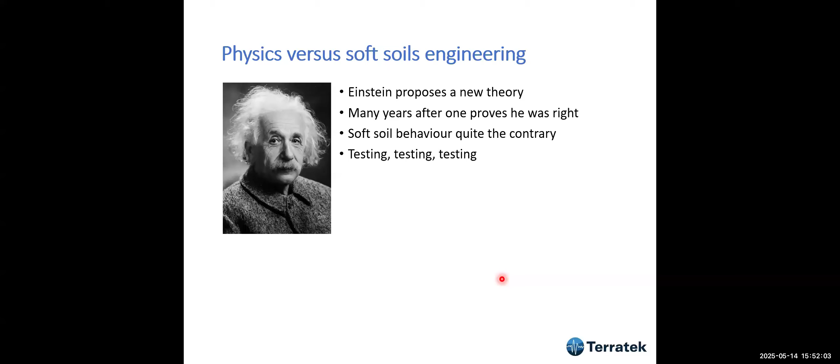So, conclusions from our talk: first of all, comprehensive site investigation, in which essentials are CPTU and VST, along with laboratory tests as well. You have to do some laboratory tests, but the essentials are CPTU and VST in soft soils. A comprehensive monitoring program - we didn't discuss a lot, but I gave you some ideas.

Theories have to be validated - there's no theory, I've seen lots of theories which were not useful. Avoid intellectual arrogance, and this was the main cause of some of the mistakes I have shown you here. Some professors came up with very good ideas, said let's do that, but they didn't have experience, so the improvement method did not work at all. You should have a humble approach.

Trial embankments for large projects. Every time you have a very large project, design a trial embankment.